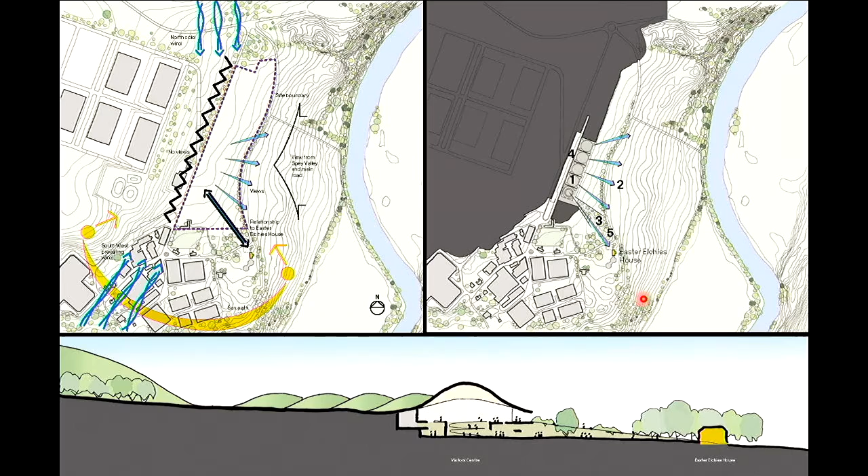You can see then moving further to the north of that initial circle are three further circles, and each of those represents a particular modular approach to production, an amount of production capacity. And the image at the bottom as a concept section is really, again, highlighting the level change connection between Easter Elchies as the yellow image, navigating the level differences, bringing you in at a lower point within the visitor centre, and making that connection.

So I show in a little slide later our initial understanding of how you make whisky. We had to understand that process. And that began to inform the modular approach and the particular circular arrangement by which we wanted to arrange the principal production vessels. Typically in whisky production, if anyone's been up to a distillery, you tend to have fermentation vessels in one particular area and the distillation vessels in another room. They tend to be typically separated. We chose to combine them together into one production unit.

And that circular approach that we deliberately took to try and elevate the particular production copper stills then started to inform the rolling form of the roof, which in itself was interlinked with the surrounding landscape as well. So the merging of these two ideas of process understanding and a landscape response.

This image is just also to show the breadth of impact from an engineering perspective, way beyond the footprint of the building. In order to get this facility to work, we've had to have a whole spider's web of civils infrastructure that make their way back down to the river and up again. We have a series of effluent routes that are required for the removal of waste products, particularly if any of the liquid happens to be alight at the time. It's a very volatile product, as well as making connections back to an adjacent biomass plant for the generation of steam. There are too many sub-stories that I could talk about really for this in a short sort of 10, 15-minute talk. So it is very much an introduction.

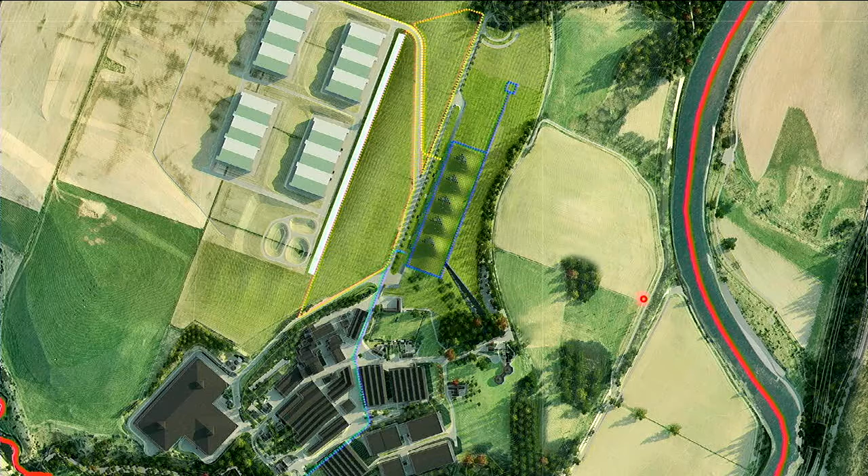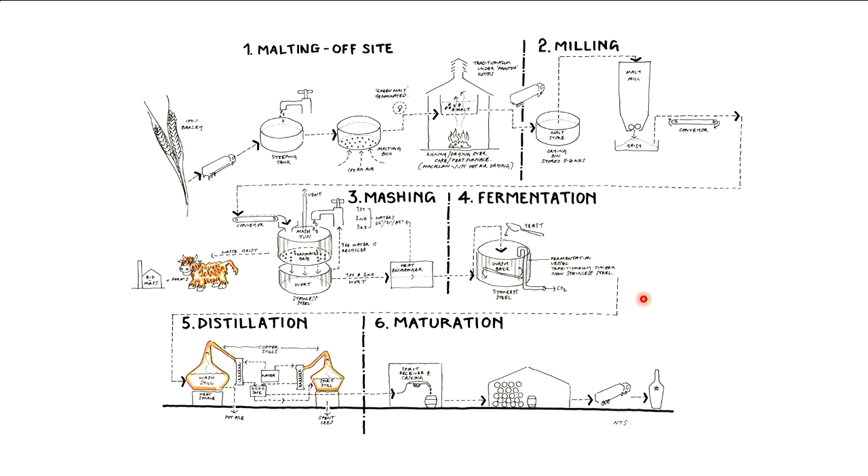So this was just our initial, very quick understanding of how you make whisky, and it was just kind of fun to do. But once we did do that, we were able to apply that very quickly to the production vessels that we were then aware would be required, and that started to inform the actual plan in a bit more detail.

So you can see here the visitor centre to the southern part, which is a combination of a taller, accentuated part of the roof with an exhibition space further to the south, and the 3 production cells moving further to the north, which are repeated. And the one to the very end is referred to as the mash house, and that's an introductory part of the process. All of this is exposed to the viewer, exposed to the visitor.

So when they're able to walk around the scheme, which will happen in the early part of the summer, very much the production process is laid bare, and that's very important to us, that everybody can see very clearly how the building works, how the building's put together.

To the rear of the building is also a production storage tank farm. Typically, whiskey distilleries have these incredibly utilitarian tank farms of malt containers and waste fluid containers as well, and they're very dominant on the landscape, incredibly so. So again, as part of the approach which would seek to mitigate its impact, we were able to sort of halve the height, increase the number, and put those under the roof of the building as well. Technically, that became quite a complex part of the project.

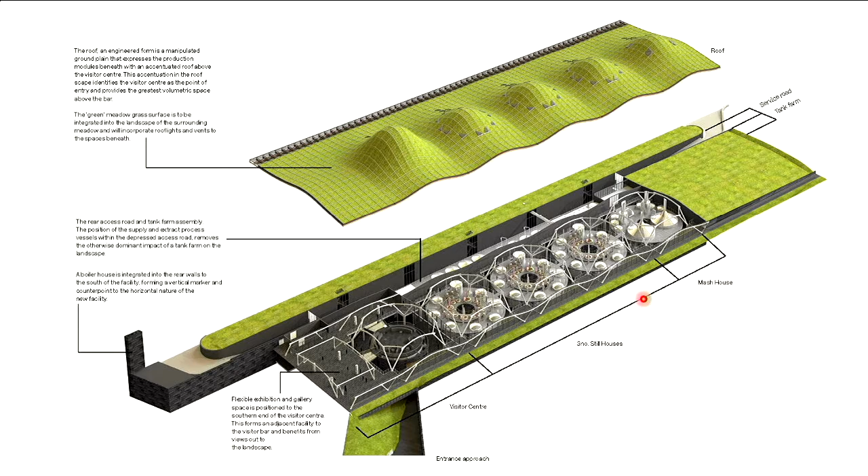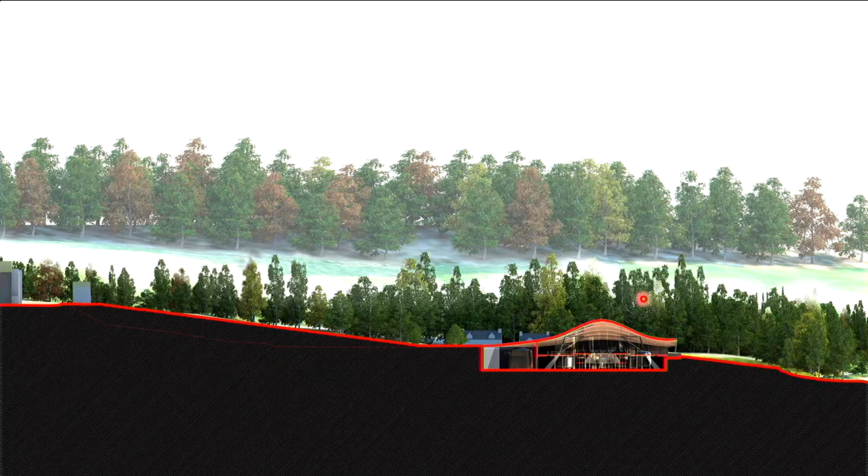I just included these for context, really. I can bounce through these fairly quickly. But so, a short cross section. On the upper part of the hill are also some pretty unsavoury, very large maturation warehouses, which I don't think the client would mind me saying. I think they agree. But what we've been able to do through the cut and fill of the excavation of the scheme is recontour the hillside to the rear, and then with a particular tree planting scheme, mitigate views of some of these warehouses, particularly from the anticipated new entrance sequence.

So again, you can see these are actually from the original competition, just the elevation and the cross section. The slightly deeper element that you can see just in this zone was introduced by way of telling the story of how important wood is to the process of making whiskey. And it's an aspect that the Macallan make a very strong play of. And that's a very special maturation cellar, private cellar in the middle of the space, which is for VIPs. But every visitor will be able to see that during their journey.

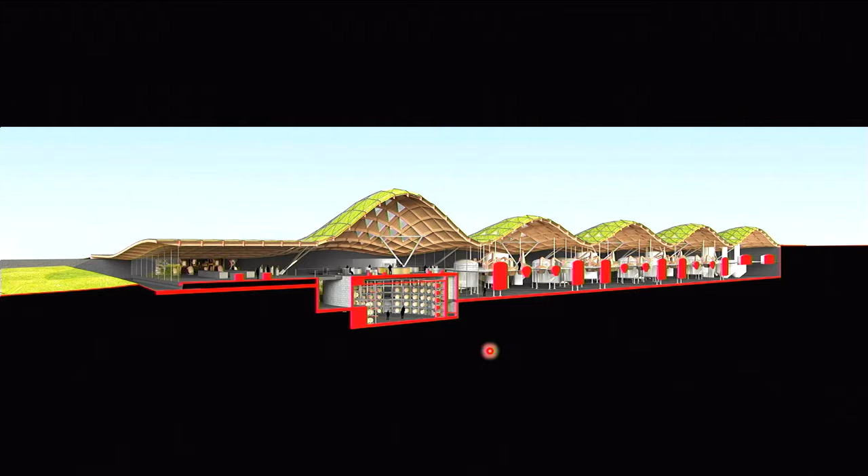The roof, as illustrated here, is fundamentally as it is. The way in which the roof lights are demonstrated is a little out of date now. That was showing just a particular cluster of north light, but there's a halo of vents that have been located on each of the roofs to the production area, which both naturally ventilate the space, but also isolate and take away particular volatile gases from particular vessels below.

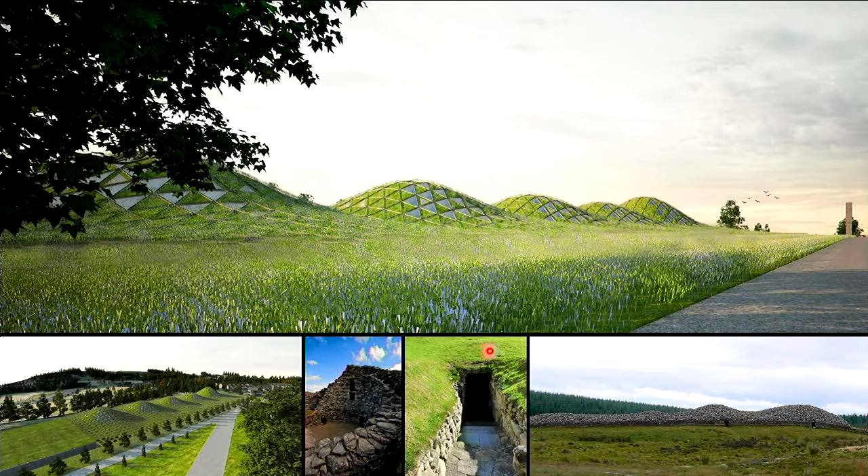And this comes back to the points that you raised, Vanessa, in your introduction about also making linkages back to long cairns, barrows, and circular broch structures, which are evident obviously in ancient Scottish earthworks, which we were able to reference.

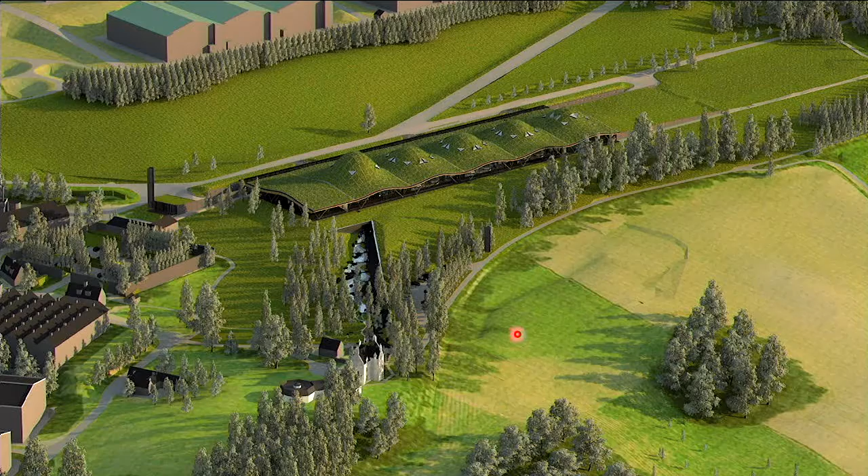And that's a rendered scheme, obviously, as an overview. Slightly more technical drawing, again, just to show the complexity of the scheme. We've been working on it for 6 years, and I think it's probably fair to say that almost every single part of the project has had its challenges.

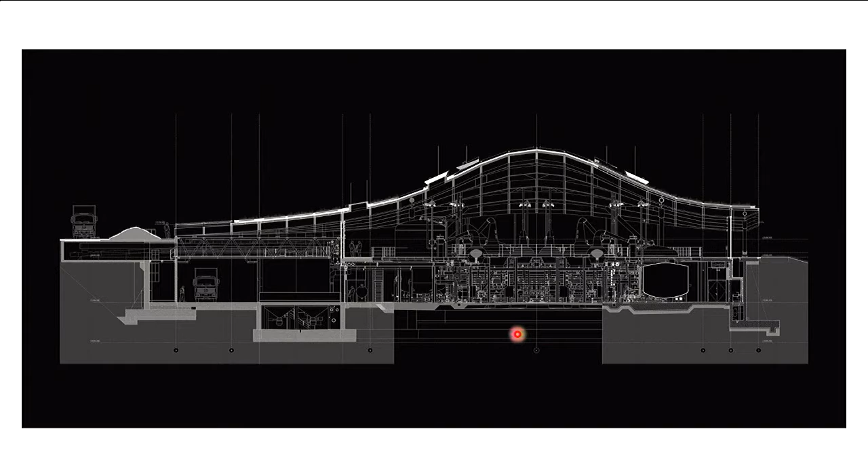That said, it's been an incredibly enjoyable project to be involved with, and I think it's just coming to fruition, and hopefully it will be well received. And then to put some

construction images in, where you can see the layering of the roof and the particular scarring that was temporarily required to the landscape to open this building up. And I'm sure Bob will talk a bit more about the particular nature of the retaining wall and the aspects of the structure related to the roof. But we just like this particular image.

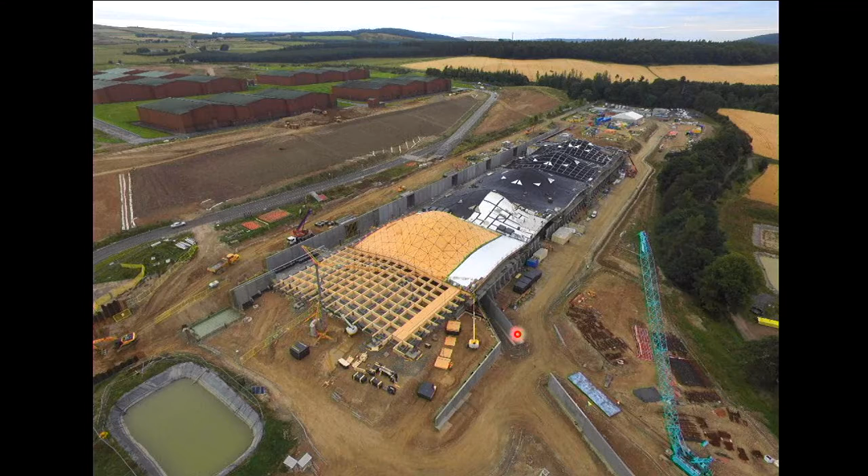You can see the warehouses that I referred to earlier at the top of the hill, which is what we were trying to mitigate through some landscaping. And there you go, that's just a nice counterpoint with the hills in the distance.

These are these particular access grids that I was referring to running across the roof, backfilled with a particular Scottish meadow grass seed mix. And you can see the service road also to the bottom of the image. This is just slightly prior to the tail of the roof being installed.

And then, just to sort of sum up, these are just some glimpses of a not quite, but very soon to be opened and finished scheme.

So this is the view up the entrance cut, obviously, seeing the rolling hills drift out of view, and you can see to the left-hand side where this is going to have a particular oak arboretum, which is picking up on the importance of oak in the production of the whiskey. That's the view at the top.

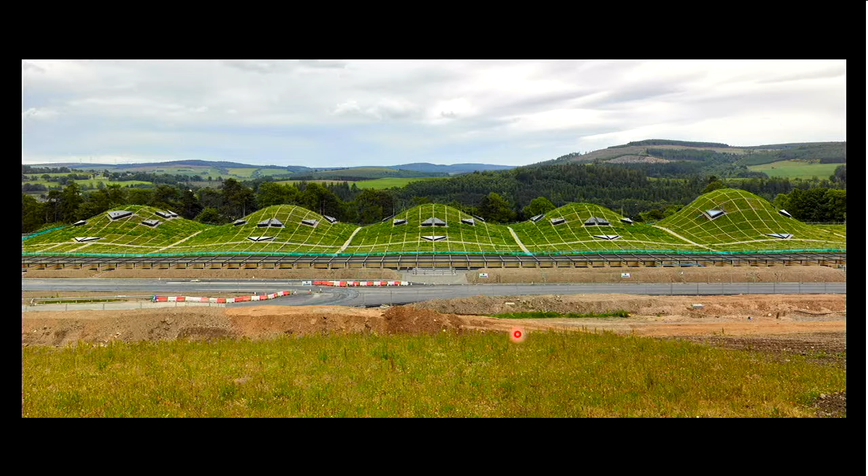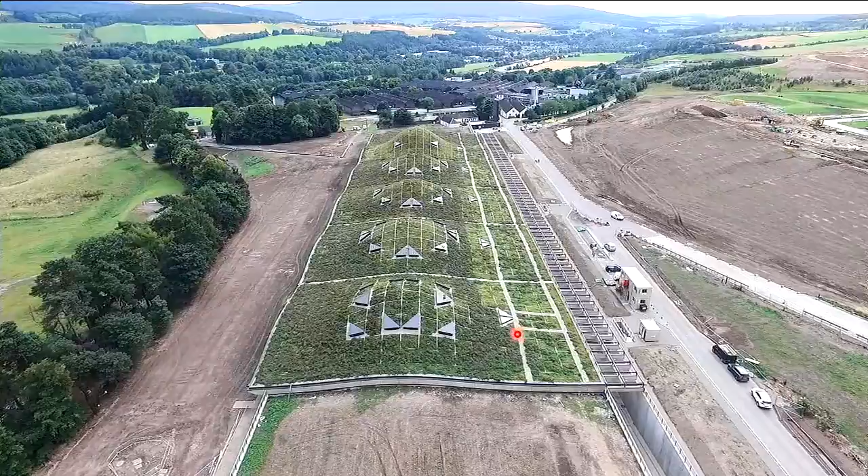And then that's just a great shot. The Macallan have got a great interest in photography, and they've got a number of overlaps with Magnum, the photographic agency. And during the process of construction, a number of Magnum photographers have been employed and have taken a particular angle, so to speak, as to which part of the scheme they would like to reflect. Some are more landscape-based, and some are more people-based or construction-focused.

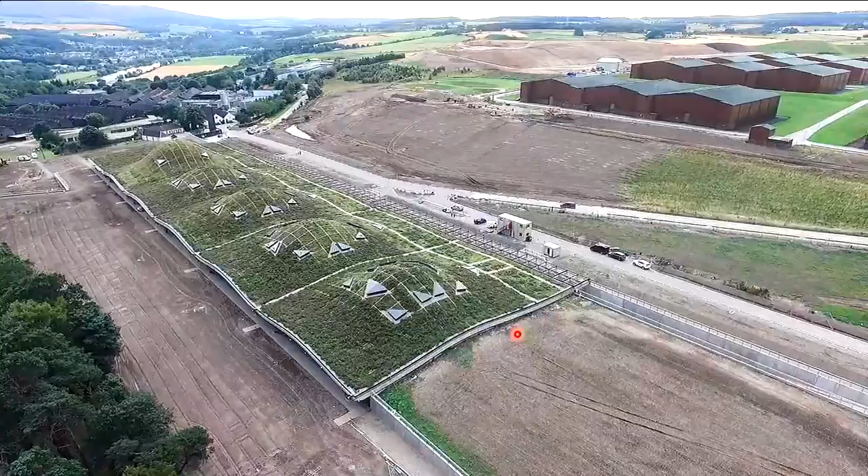And then this is a little out of date. This is from September last year. So actually, if we were to go here now, you would see quite a bit of difference. But nevertheless, you do get a sense of the scale of the building. It's about 60 meters wide and about 220 meters long.

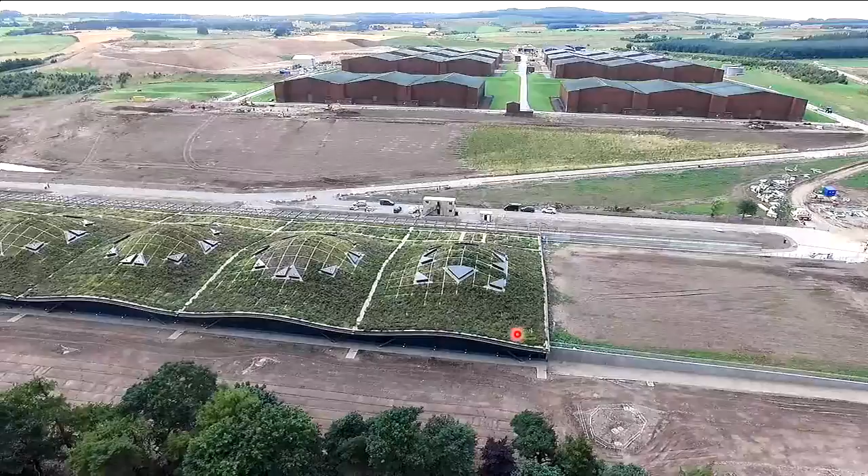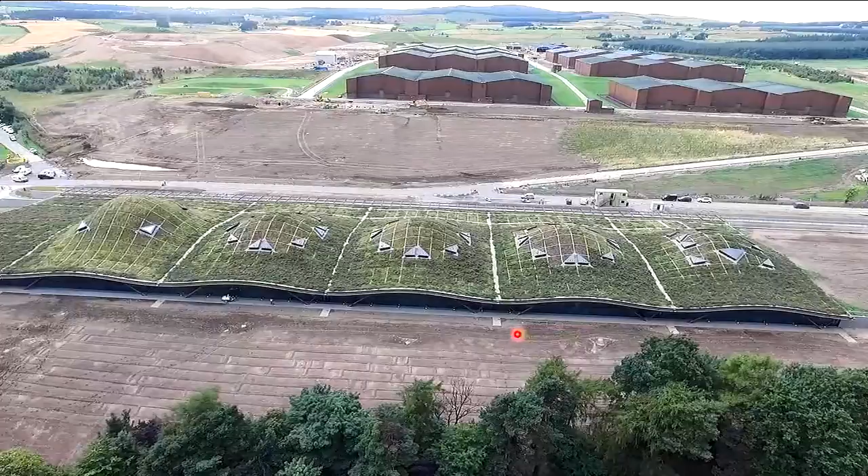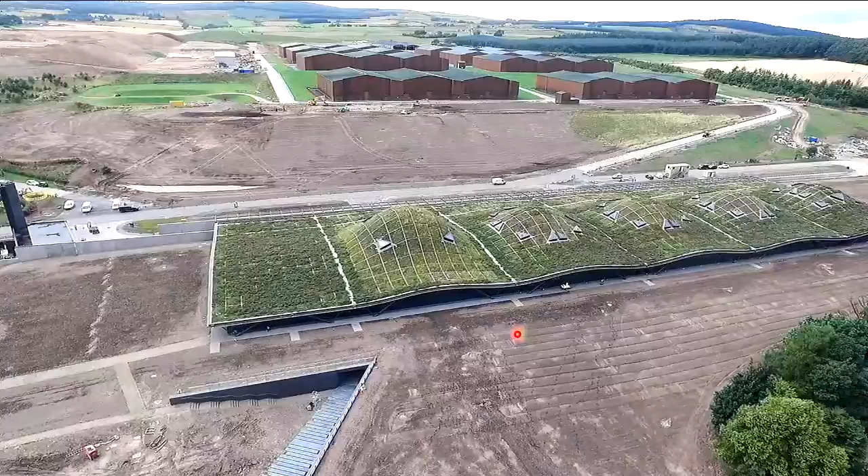Beneath the tree line here is a separated visitor access road. So unlike the scheme before the project, where all traffic came in at a particular point, the scheme is now separated. Front of house visitor traffic is segregated away through the tree line here, comes down to a new landscaped car park, which gives you a glimpse past Easter Elchies House before you then make your way up that entrance cut and then in underneath the earthworks into the scheme, which then reveals itself.

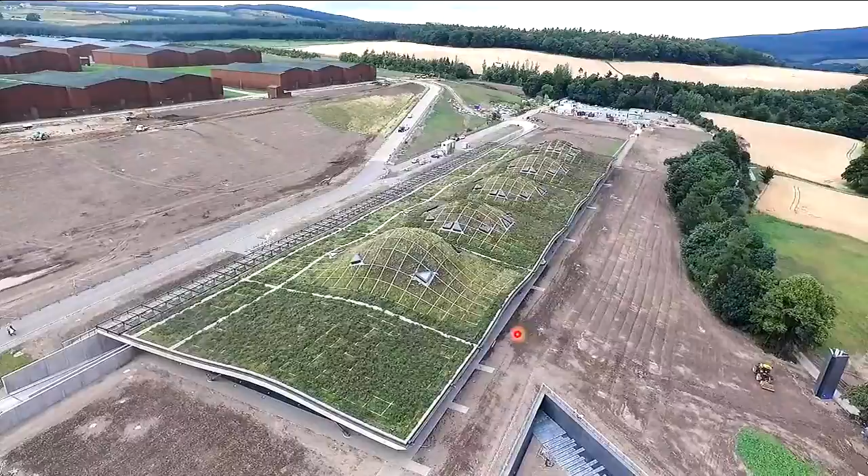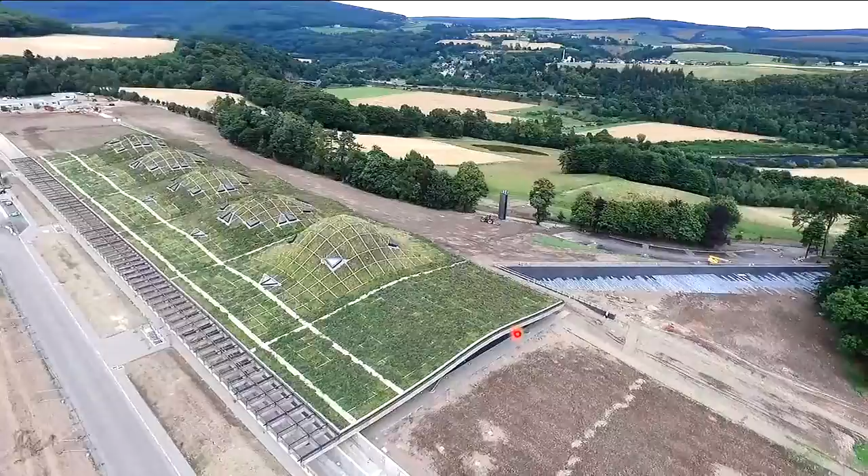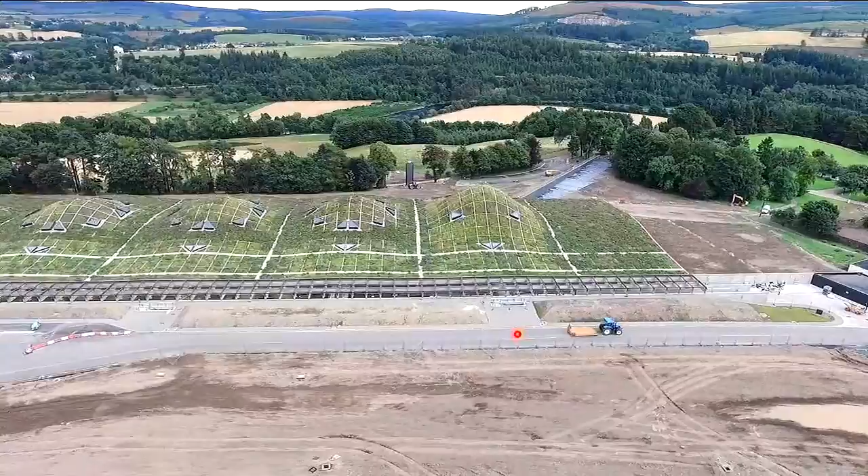Unfortunately, I can't show any of the internal images, so I'm afraid I am limited on what we can discuss. But as I say, it is a glimpse, a little introduction, a little teaser, really. So that's about it. That's just a little taster. I hope that's okay. There's not a lot more I can say at the moment, but I'm sure things will come out from the Q&A.

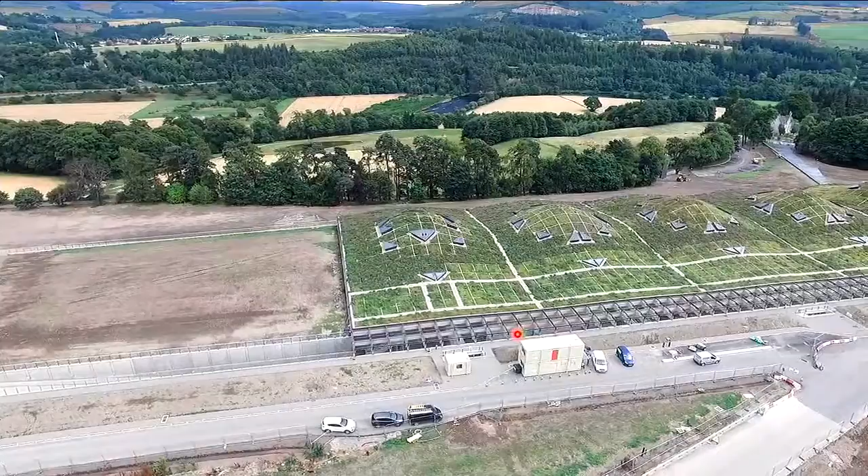So we will question you closely. Yeah, I'm sure you will. Yeah, thank you, Toby. Okay. Thank you. Thanks, Bob. Which do I press? This one?

I wish I could say that these were epiphany sketches. They're not. This sketch particularly defined the very early discussions that we had as a team going back to 2012. There was an interest in creating a dome above a circular array of stills, and the shape isn't willful. The stills are very hot, 100 degrees or thereabouts. The air above that is also very hot, and it rises.

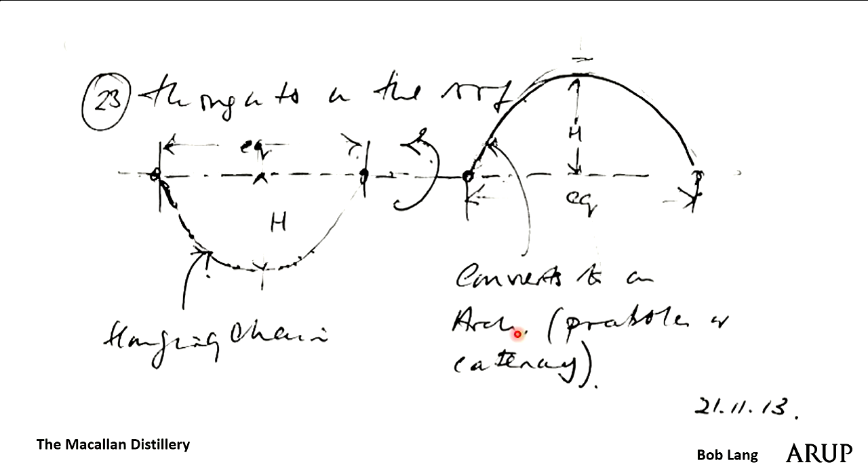So in order to minimize the amount of motive force that's needed to push the air through, if we could let the air rise and let the air out of the roof, you could minimize the amount of fan power required to clear the air. That meant that we needed to look for a domed form. It just happened that it fits into the landscape very well also.

So we looked at an inverted catenary, which has certain properties, and if we could match the slope between the catenary and its opposite, the arch, then we might find an interesting form. It was the start of a discussion. That is all. This one.

These notes and things are a summary of a position in time. They're not the epiphany moment. So we looked at taking the catenary or something similar to that and making a revolute and arranging those domes above a circular array of stills. And carry on the tension theme.

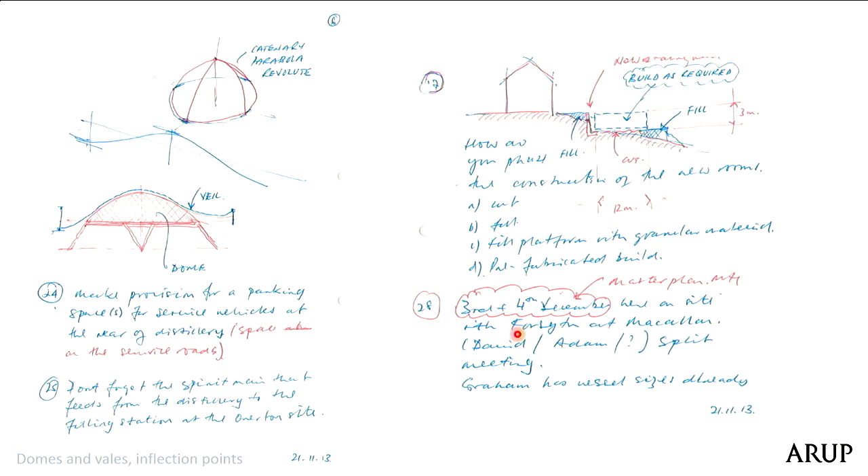If we could lay a veil over that, drape a fabric over that, we will get a very clean point of inflection between the skin and the dome. And it's kind of very simply represented there.

The second major point was that whilst the building appears to be buried, it's got 6 inches or thereabout of earth over the top of it, so it's not very far underground. But it meant that we could do it cut and cover, so we could actually carve the hillside clean and build on the virgin ground, which was quite good. And by doing a cut and fill exercise, we might balance the amount of excavation that was required.

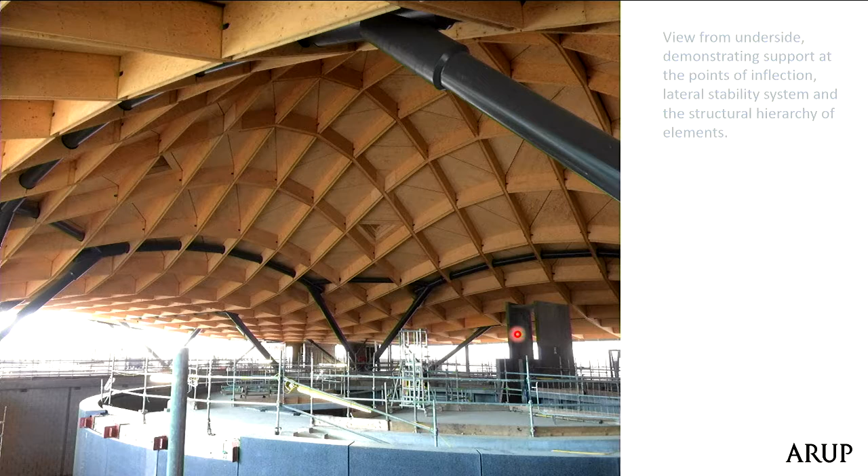And by altering the properties of that fabric and respecting the boundary conditions, we're able to make sure that we got semi-decent folds to bring the water to the edge of the building and drain it. It also gave us a combined surface with a constant point of inflection, where we could possibly put some support.

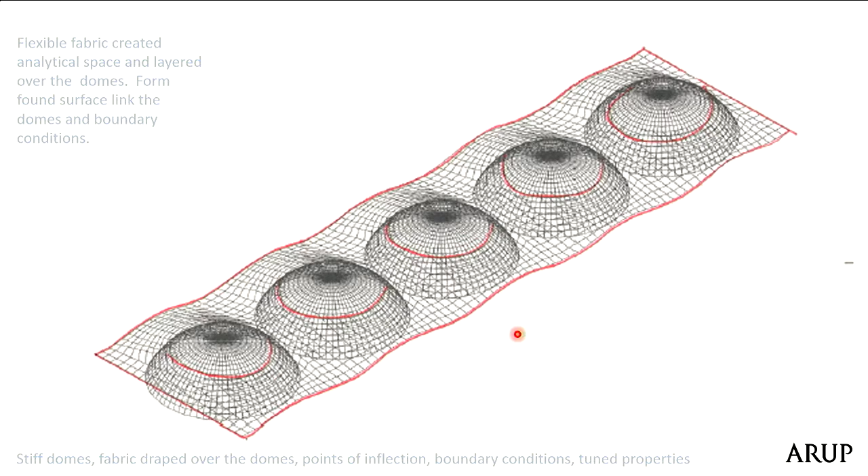Because what we didn't want to do was to take the retaining walls all around the building. We didn't want to take that force into the walls. We wanted the roof to be completely divorced from that, so that the timber literally just worked to support the roof and the earth. And this is what that manifested itself in being.

Life being what life is, we didn't actually find the point of inflection between the fabric and the dome. It was just off. And to those of you that understand these things, that means you've got pretty high shears to deal with. Not perfect by any means, but it was a starting point for a discussion.

And what you see here is the ring structure that effectively picks up the end of the dome, and also, because of its shape, it can take all the lateral forces. So the imbalanced snow load, the wind load, and anything that gives imbalance to the top surface of the structure is taken in that steelwork.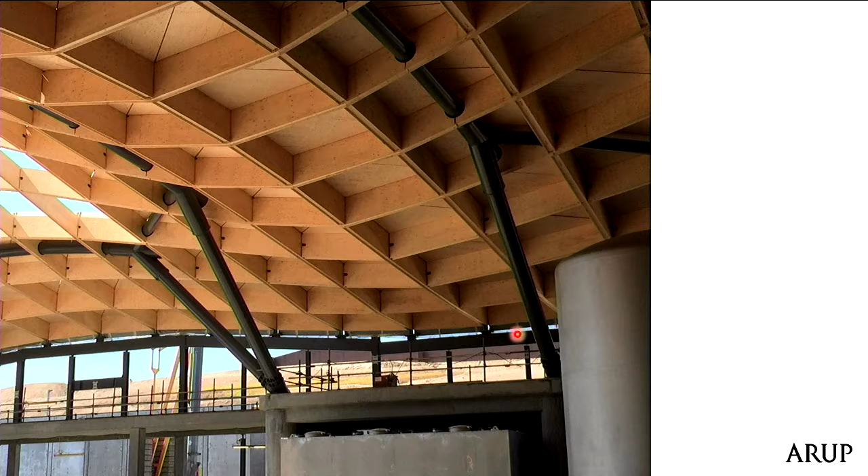And what that means, we can liberate the roof from any forces from the walls. For a buried structure, that's quite a difficult thing to do often. You look for the roof to be a membrane. Our friends at SH Structures helped us with the steelwork, and Wiehag the timber roof. I'll talk in more detail about how these particular forms were developed later.

Now, once we developed the surface by the means I described, we were then able to look at how that surface performed. And what you see, the purple is really where the high compression forces are, and there's steelwork in that location. But basically, you've got a series of ribbons from which this whole thing is supported.

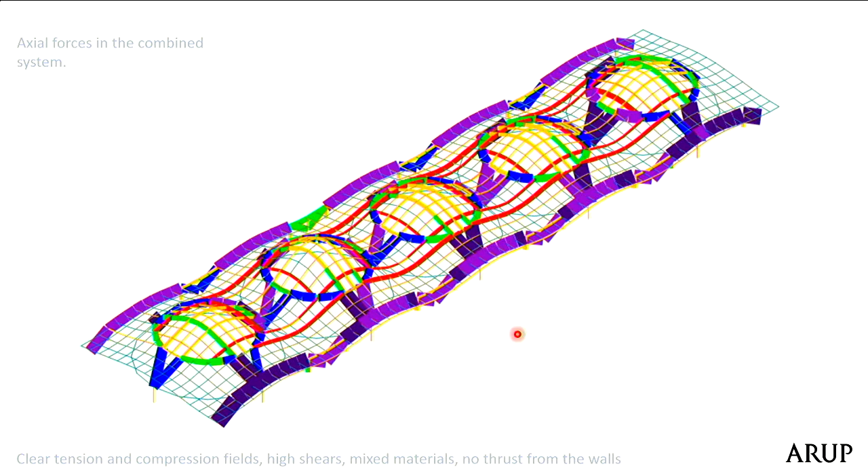And those of you that know, timber has some capacity. It's not fantastic. So we knew that we would have some quite high tension forces to deal with, which we did. At the same time, that's one condition. The second condition was we knew that timber is particularly sensitive to temperature and relative humidity.

So we did some computational fluid dynamics, which modeled the vessels at their temperature. We made assessments of the relative humidity of the air, and were able to predict, it's a prediction, the temperature and relative humidity immediately adjacent to the timber at the roof. And it was reaching circa 33 degrees, which is hot. And we tried to keep the relative humidity above 20%.

Because, put in very simple terms, we didn't want the timber to dry out too quickly or distort or become brittle. There was much wailing and gnashing of teeth that went into that discussion, and we agreed with Wiehag some limits, which we were able to justify analytically. And measurements today in a semi-functioning facility are reasonable.

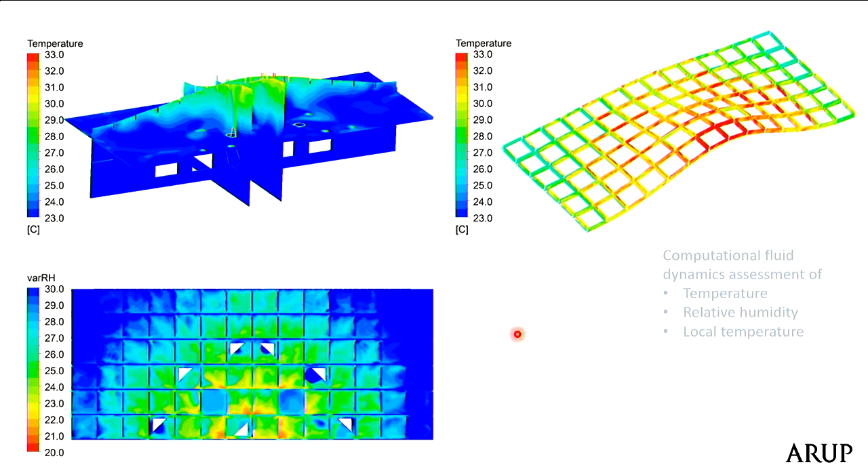Sorry. What that then allowed us to do was to put some form to this roof. And I'll speak to the geometry now, if I may, very briefly. Once we got this surface, domes and veiled fabric, if you like, in place, we drew a 3-meter grid on the ground and projected it vertically.

And that allowed us to plan certain things with a large degree of rigor. The process is an extremely complex thing and needed coordinating. There were vertical things to coordinate. So we projected a 3-meter grid onto the formed surface, and then that gave us the position of all the elements, which you can see there.

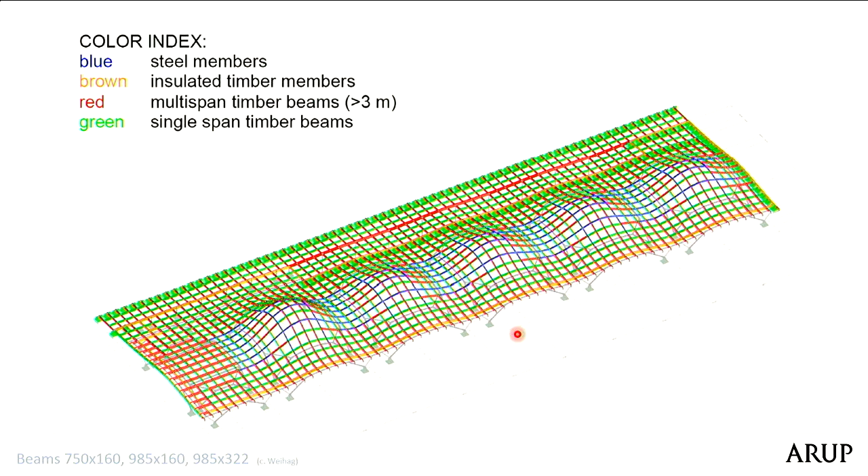We had predominantly timber, but accepting that there was going to be tension, our design was such that we would create a hollow box of a fixed dimension and put steel down the middle, or whatever was needed down the middle, so we could tune that form. Because your gut tells you that something about 500 mil is too shallow, a meter 50 is too deep. Something around 750 to a meter would probably look right in scale terms.

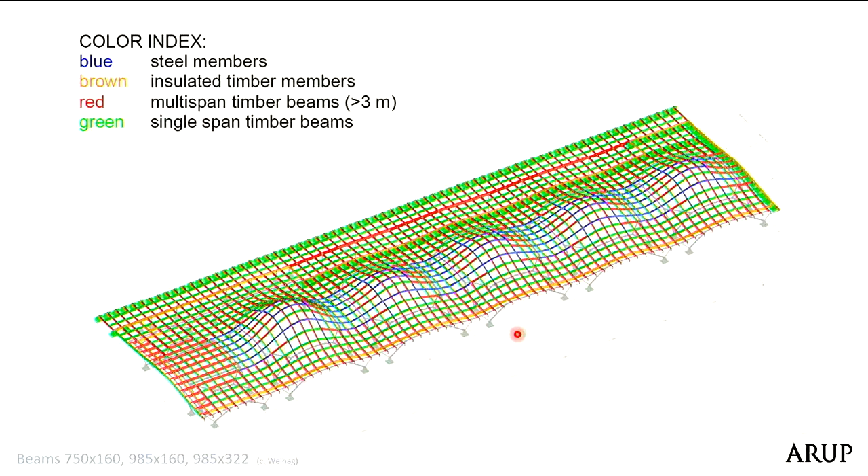Now, don't ask me why you make those decisions. They're the kind of instinct. You know that. And we began to test that. So, silly sums, and they are silly sums, but they tell you where you are in very reasonable terms. If you just said that it was a beam that spanned between the points of contraflexure of a dome, it would need a certain size. It failed miserably, so we said we'd put some steel in and made a provision of 12, 15 kilograms a square metre of steelwork to make that work.

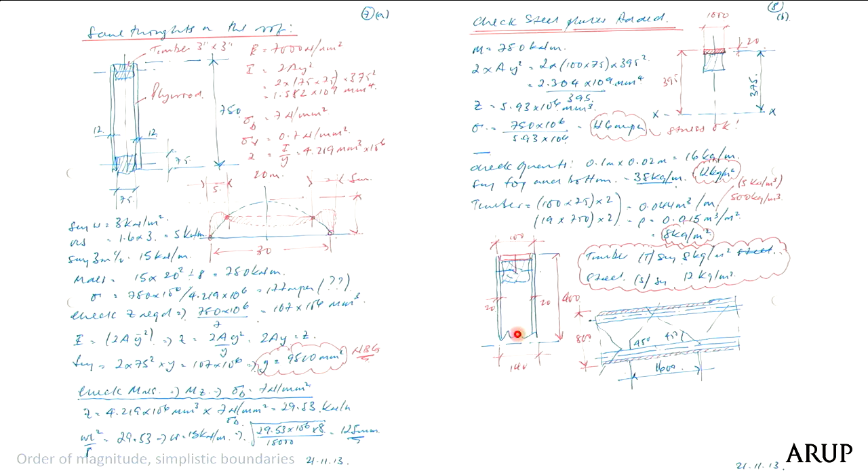But the 750 by circa 100 was the kind of scale of element that we were looking for. And these are just really early attempts at trying to decide what planet we're on. In the end, we took these kind of sizes. So we ended up with a 750 deep, 160 wide, plus LVL cheeks. So we did it with a glulam, because that's what Wiehag could make quickly. So it's not a bad guess.

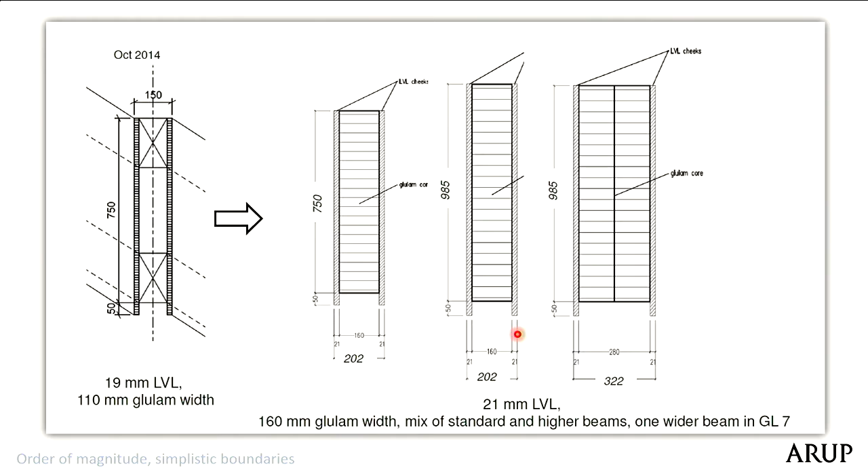When we ran out of capacity, we pushed the top of the beam up into the cassette zone, which is the timber panels I'll show you later. And then where we had really big forces, we were going to put steelwork. They twisted our arm and said, can we do this in timber? Why not? So we got one or two really big pieces in there that really didn't relate in any way to the first analysis, but worked all the same. And what you see here is the physical manifestation of that.

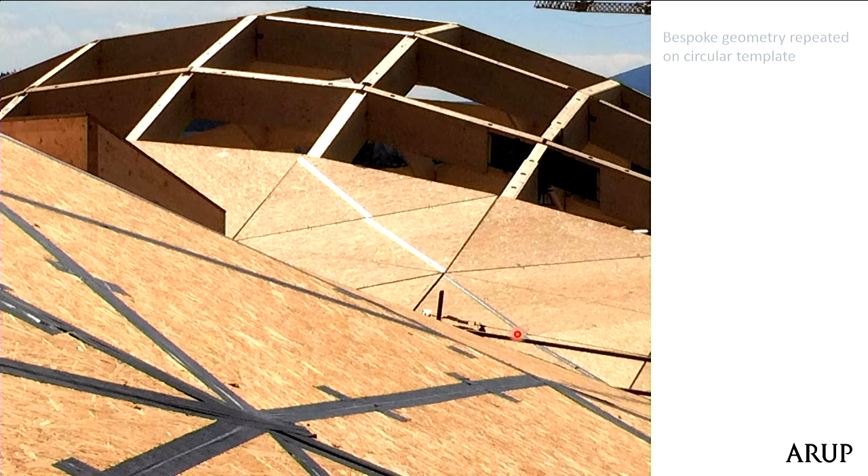There's a whole story on angles and cuts and bespoke geometry. Essentially, because you project the 3-meter grid onto a surface, everything changes length. Well, because it was circular, you got repetition. And because it was triangular, based on a square, you could create something that wasn't warped in itself. So there was a certain logic to that. The devil's always in the detail. Here you see it, that's the physical manifestation of what I've just described.

So we got a very rectilinear system, and timber likes being stacked on top of itself. It'll bend a bit, it'll stretch a bit, and compress a bit. But generally, unless you really do what timber wants to do, you'll be challenged. In much the same way that concrete was challenged when it was faced with tension. Why not? So we took the decision to reinforce it. To this kind of effect. If you stood underneath that and lay on your back and looked up, it would be a perfect square.

There's also a very natural hierarchy here, because there are big arch beams that go mutually perpendicular to each other that sit on these steel frames, and then they are infilled with secondary elements. Down the center of the big arches are pieces of steel. Where timber alone works, we just use timber.

And for those of you who are interested in structures, we do not rely on the panels to be a membrane. They want to. They cry out to be a membrane. But we didn't let that happen, because the local bending was weak and the shears were quite high. So we took everything in axial and bending in those rectilinear beams, and the panels really just clipped on top.

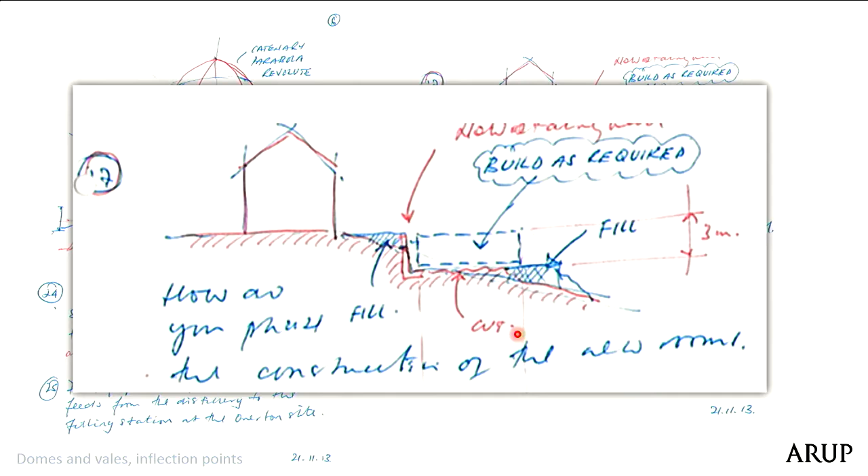Moving quickly on, this was the doodle of that era, and it wasn't 3 meters deep, it was nearer 15 meters deep. The water table was relatively low, the ground was good, so we were able to do an open cut, a battered open cut, and create a 9 meter, occasionally 15 meter high freestanding retaining wall. Freestanding, very important. It didn't rely on the roof to stabilize it.

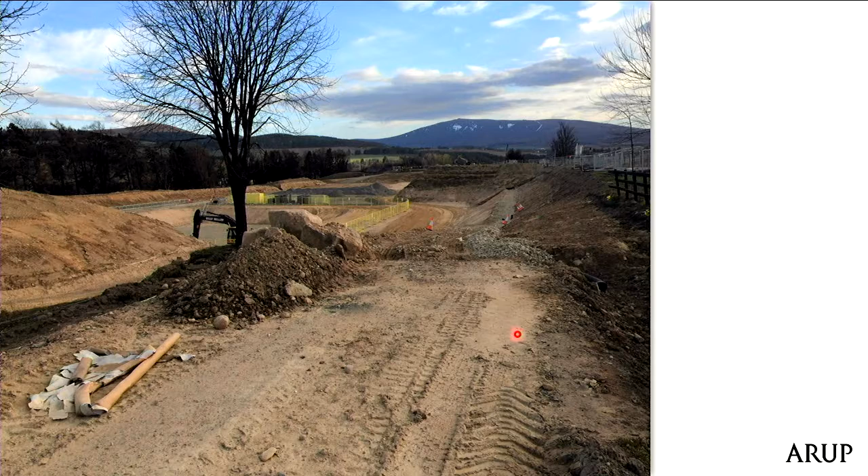The physical manifestation of that is what you see here, which is about a 300 meter by probably 80 meter scar in the landscape, which at the time was done in remarkably good condition. We had a great summer and a great winter to do this. And one of the big problems was, and the big environmental statement here is that no runoff reached the Spey.

So we developed a whole series of holding ponds, cut-off trenches, attenuation that stopped the silt effectively reaching the Spey. So whilst this building appears to be underground, it was actually built in open cut, and then it was backfilled completely. And our friends from RIW we owe a debt of gratitude to, because there were some pretty complex waterproofing details there. And we control groundwater rather than take the pressure on the wall.

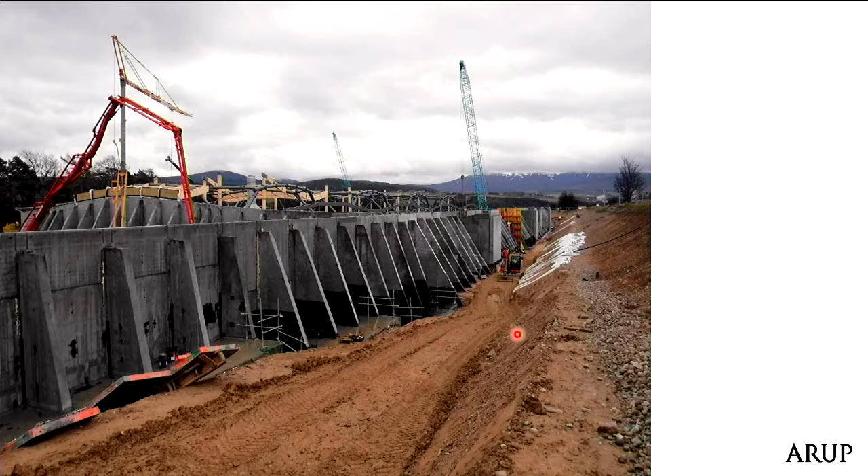Said wall, it's a counterfort wall. All this was backfilled. That's about 9 meters freestanding. This goes up. The big wall you see here is about 15 meters or so, and the roof literally just sits atop of that. So there are sliding joints that allow that to happen. So all the major stability is under the ground.

We got told off by the contractor because he thought the counterforts were too big. We said, well, here's the perfect diagram for each counterfort. They were all different. So in the end, by standardizing the size and standardizing the reinforcement, that allowed them to push through very, very quickly. There's no movement joints in the wall either. It's 250 meters long. So we literally reduced the section to concentrate to relieve the longitudinal stresses and did a pour sequence. So for those that are interested in those things.

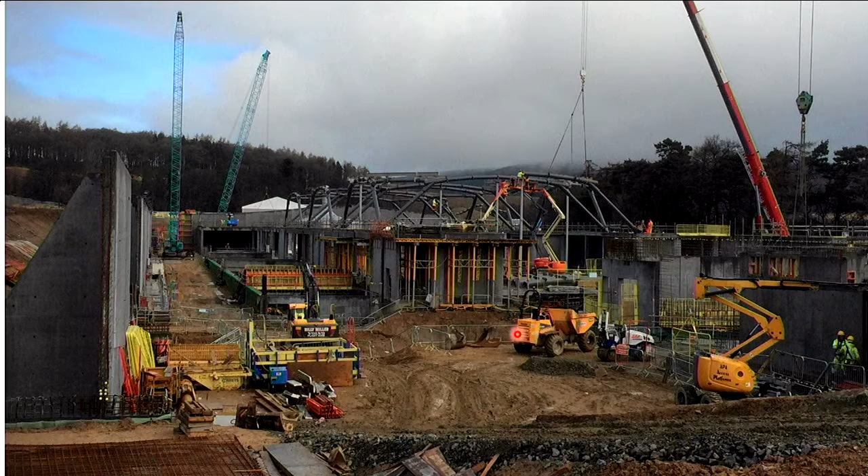So the ground slopes to a drain. That drain then comes out of the building to the front, grid line 2, which you see this side being that way. And once the fire alarm goes off, by some magic of the fire engineer, we're able to turn a valve that, instead of it going to the effluent plant, takes it down to a holding pond here, and it is then held there and taken to contaminated waste. So it's a really complex, great story on the civil engineering. Come back and talk about it one day.

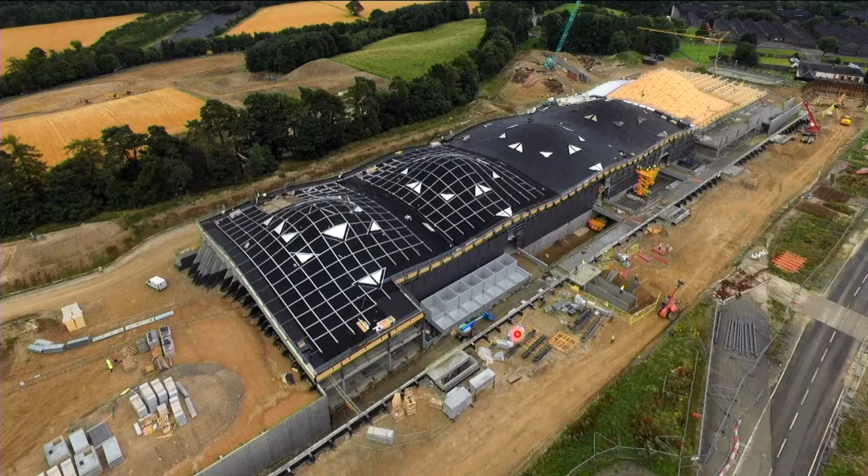And in however long that took, that's about 6 years' work. There's 3 more stories to tell. Maybe you'll have us back. That's it. Thank you.

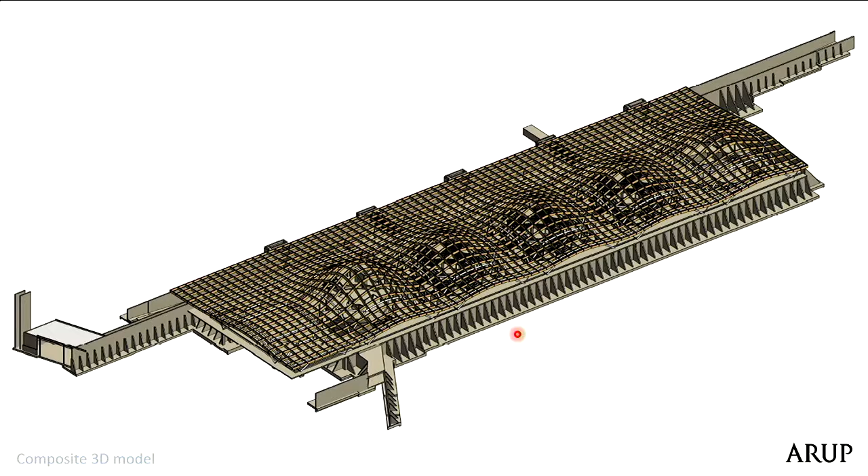What strikes me about this amazing project is the amount of original thinking that you had to do. It's also beautiful seeing that drawing of the process of distilling the whiskey, and that does seem to have really had an impact on the final form. But you talked about Mayan architecture, you talked about the earthworks and the bodegas, and I think the practice has already built bodegas. Were there other references you could use? The project seems so original. Was there anything else that you could reference and look at to help you?

I think, that's a good question. No project, of course, is truly original in some senses. I mean, at one level, there's that expression, there's no such thing as a new idea. And I think everything is building on previous experience, certainly from ideas that may or may not have come to full fruition previously, that maybe a new project gives the opportunity to develop and try things again, perhaps.

Yeah. And I think, hopefully, there's a certain truth to what we were saying earlier. The concept did emerge and come out of an understanding of the way in which whiskey is produced, the way in which that process diagram works, reorganising it critically, I think, reorganising it because the brief required it to be a phasable scheme.